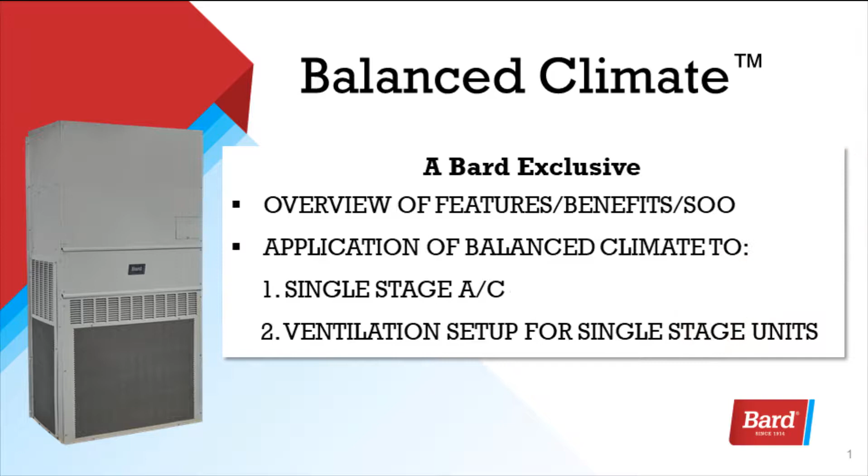Bard units are equipped with the capability of running in balanced climate mode as they are re-engineered to the 2019 Department of Energy standards. The remaining two-stage units already above the standard will have this feature added over the next 12 months as they are upgraded to the new cabinet style.

Balanced climate is designed to increase the comfort level by reducing the indoor humidity. Extended runtime with reduced airflow allows the unit to extract more humidity during cooling operation. Balanced climate provides quieter operation, up to 35% less humidity in the space, and this depends on the model and the conditions. It provides softer starts and increased comfort level.

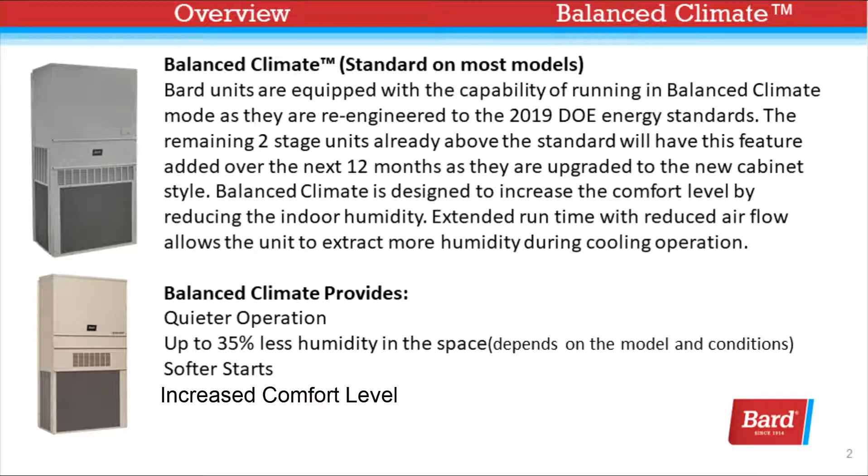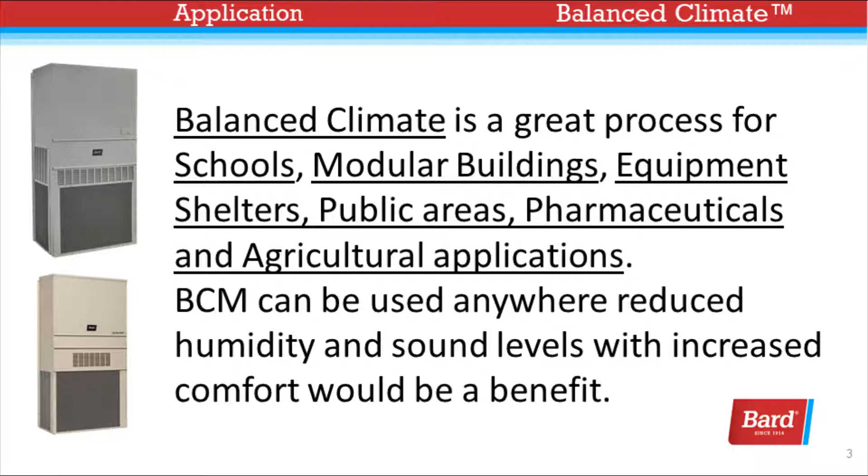Balanced climate is a great process for schools, modular buildings, equipment shelters, public areas, pharmaceutical and agricultural applications as well. Balanced climate mode can be used anywhere reduced humidity and sound levels with increased comfort would be a benefit.

All units are shipped set up to run in standard mode just the way Bard units have been in the past. To engage balanced climate mode, simply remove the brass jumper as seen on the right between Y1 and Y2 and install a two-stage thermostat. This applies to single-stage applications where the lowest set point is 72 degrees and no vent package is installed. Applications requiring a lower set point than 72 degrees may cause icing on the evaporator.

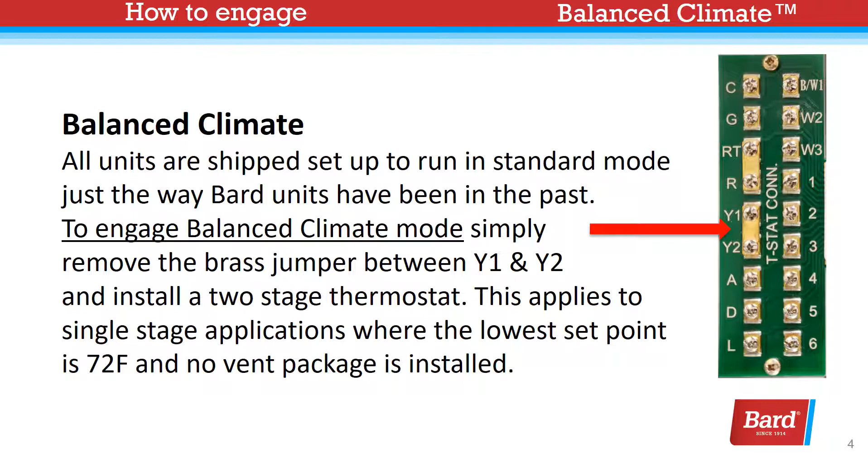Y1 will automatically bring the air conditioner on in balanced climate mode and extract the maximum amount of moisture while cooling the space. If the temperature continues to rise, Stage 2 on the thermostat, Y2, will gently shift the wall mount to standard full load cooling with the rated airflow.

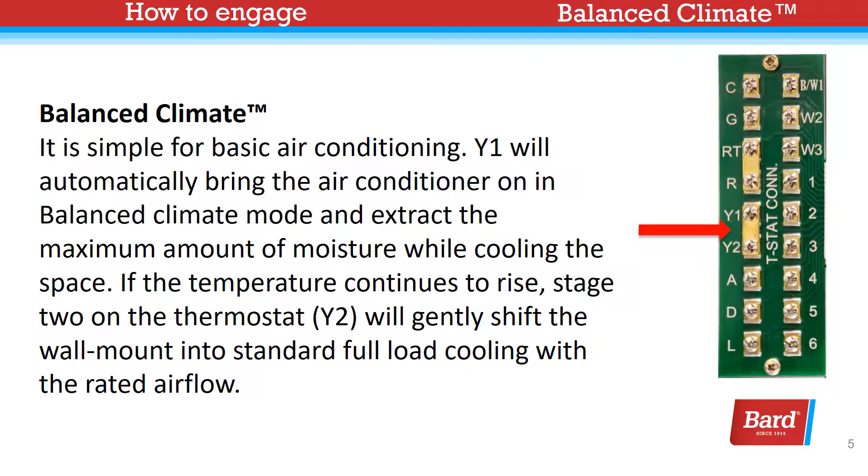At the top left, the 3-ton unit, you can see 95, 80, 67 conditions produced a 24% increase in latent cooling or moisture removal. At the bottom left, 95, 75, 62 conditions, balanced climate mode latent cooling increased by 52%. For more balanced climate data, please see the model specification sheet.

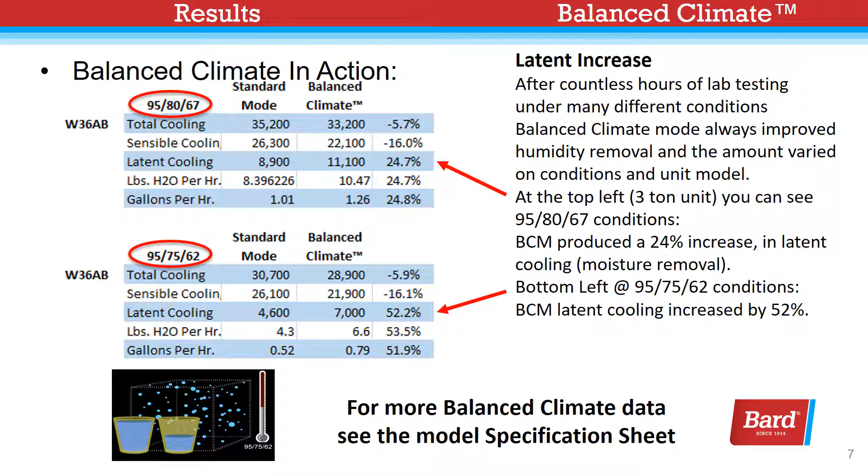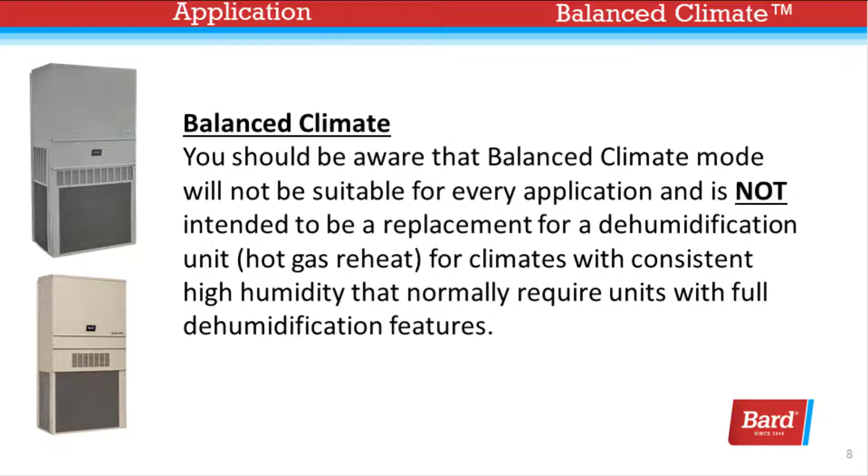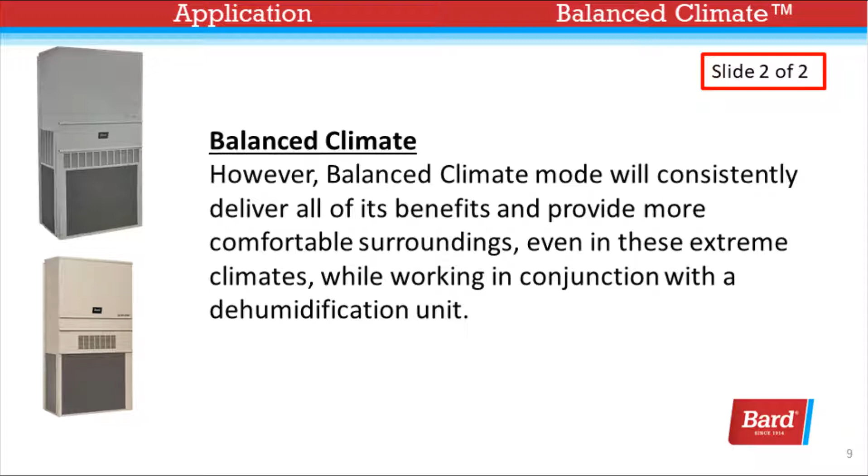You should be aware that balanced climate mode will not be suitable for every application and is not intended to be a replacement for a dehumidification unit or hot gas reheat for climates with consistent high humidity that normally require units with full dehumidification features. However, balanced climate mode will consistently deliver all of its benefits and provide more comfortable surroundings even in these extreme climates while working in conjunction with a dehumidification unit.

Also, on applications where the sensible BTUs are very close to your required BTUs, enabling balanced climate may not be the right decision. Remember, we convert some sensible BTUs to latent BTUs for dehumidification purposes.

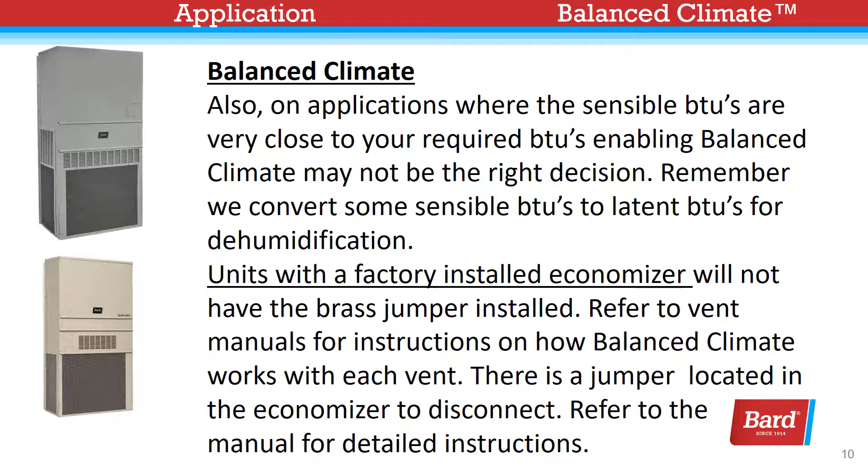Units with a factory-installed economizer will not have the brass jumper installed. Refer to the vent manuals for instructions on how balanced climate works with each vent. There is a jumper located in the economizer to disconnect. Refer to the manual for detailed instruction.

If the application is likely to require air conditioning operation below 60 degrees outdoor conditions or is installed with any ventilation package, a Bard low ambient control kit must be installed. The low ambient control kit is equipped with an additional sensor that disables balanced climate mode when the outdoor temperature drops below 50 degrees Fahrenheit. This prevents potential evaporator coil freeze-up issues.

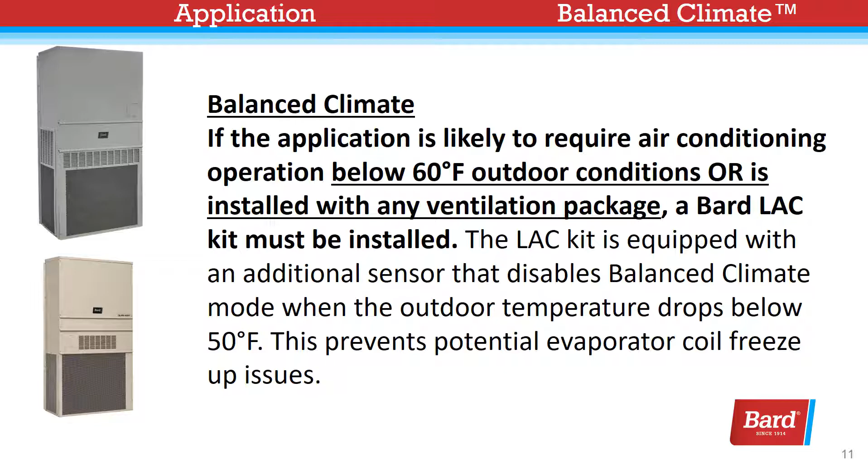Because part of balanced climate depends on lower airflow, attention needs to be directed toward the system static pressure when balanced climate mode is engaged. The system static pressure needs to be verified below 0.2 of an inch water column. For ductless applications with the correct registers and grills, there won't be a problem. However, some ducted systems will not be a good candidate for balanced climate.

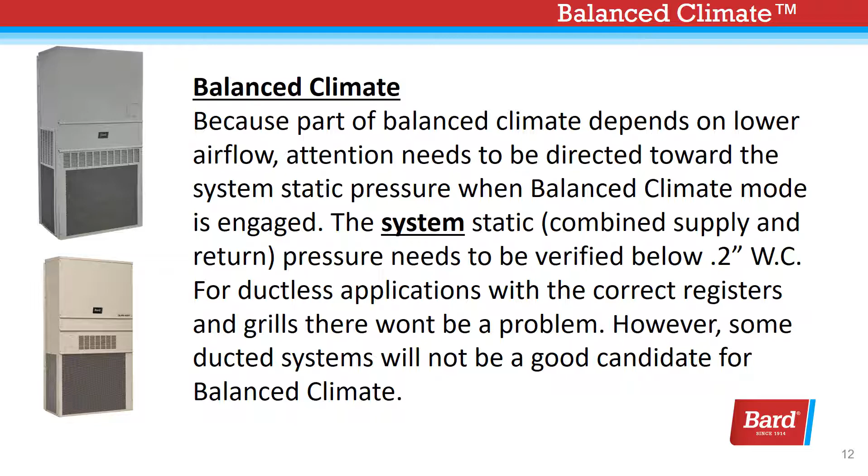Here we're looking at a single-stage system with no vent package. To operate a single-stage unit in balanced climate mode, a two-stage cooling thermostat is required. The lower indoor airflow operation is overridden by using that two-stage stat.

If the call for cooling is not satisfied within a given time frame or temperature differential as specified by the thermostat, it will send a signal to Y2, which then increases the blower speed back to the rated speed, creating more sensible BTUs and removing less humidity. See unit installation instructions for more blower speed selection options.

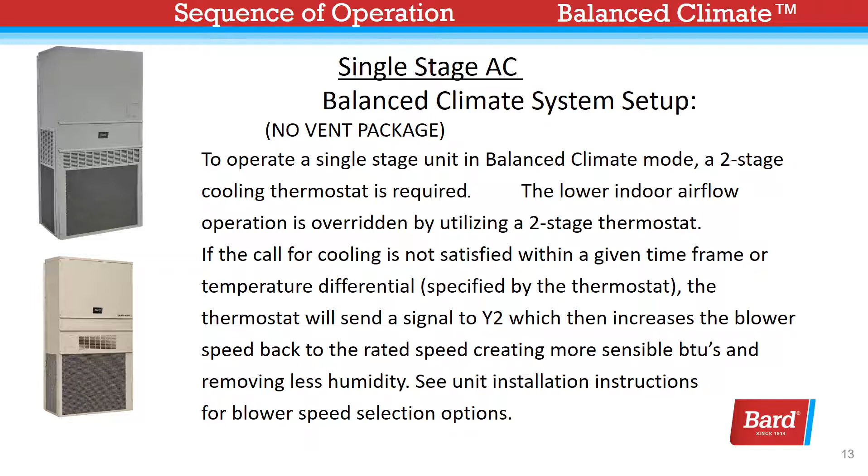With a vent package, setup will vary depending on the type of ventilation package selected. For complete instructions, please review the instructions shipped with the vent, or unit if the vent is factory installed. The following slides are an overview.

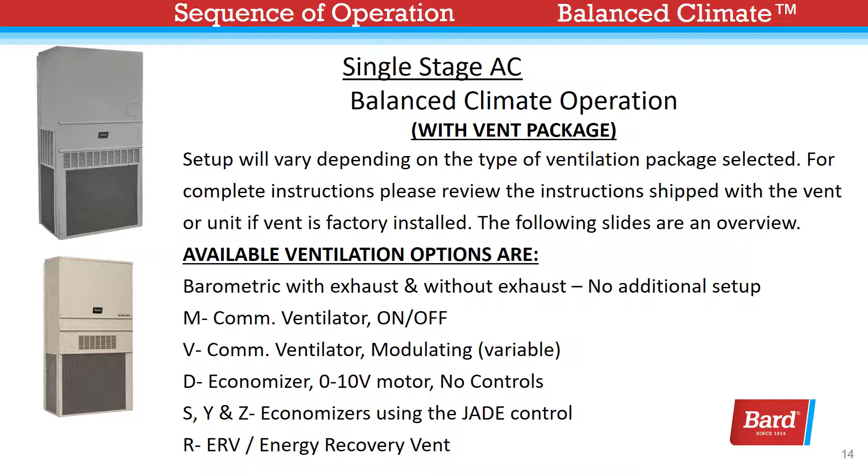The available vent options are barometric with exhaust and without exhaust, and there's no additional setup for these. The M vent option is a commercial ventilator with a simple on and off. The V is for variable on a commercial ventilator. D is for a DDC economizer with a 0 to 10 volt motor and no controls. S, Y, and Z are economizers utilizing the Jade control, and the R package is for an ERV.

Slide 1 of 2. For an M package, which is a partial flow commercial ventilator with a simple on and off.

Units ordered with this option or field installed vent kit are shipped with a jumper from Y1 to Y2 installed. Removing this jumper activates balanced climate mode. Because both balanced climate and space ventilation depend on a single source blower, there are variations to consider.

First, stage 1 cooling with a call for ventilation moves the fan speed to the balanced climate and opens the ventilator. To achieve your specified CFMs for ventilation, you'll need to increase your settings and adjust for the balanced climate airflow. You'll be slightly over your specified CFMs if the temperature increases and Y2 is energized, causing the fan speed to increase. However, this will meet your required CFM and deliver superb comfort.

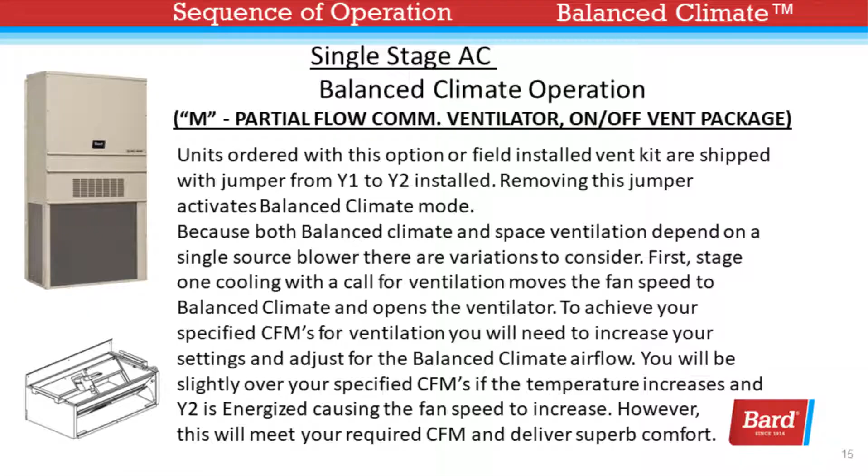Blade adjustment for desired ventilation air. Remember, on all the vent packages, the amount of ventilation air is dependent on 4 factors: return air duct static pressure, supply air duct static pressure, indoor blower motor speed, and the damper blade open position. So in all cases, Bard recommends an air balance. In lieu of an air balance, we give you some suggested settings that should get you very close to what you're looking for. Refer to the appropriate graph in the manual and be sure to compensate for the balanced climate mode fan speed.

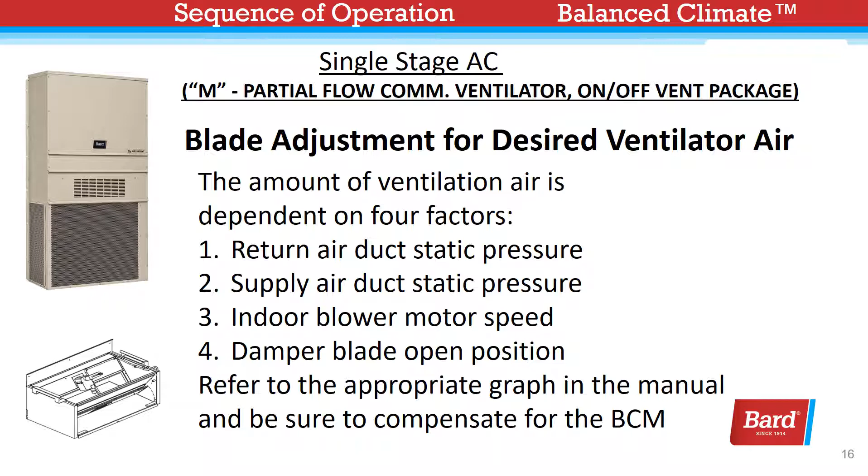For the V package, which is a commercial ventilator with a variable blade operation, when engaging balanced climate with the modulating vent package, follow the instructions included with the vent. During setup, the blade will need to be adjusted to a setting between 25 and 30% more air than required for ventilation to overcome the balanced climate fan speed and meet the ventilation requirements. However, when the speed is increased on a Y2 second stage cooling call, you will be slightly over-ventilating. The code will be met and comfort for all.

If a CO2 controller is used, the damper will automatically adjust for the correct number of occupants based on CO2 and fan speed. This is a recommended setup method.

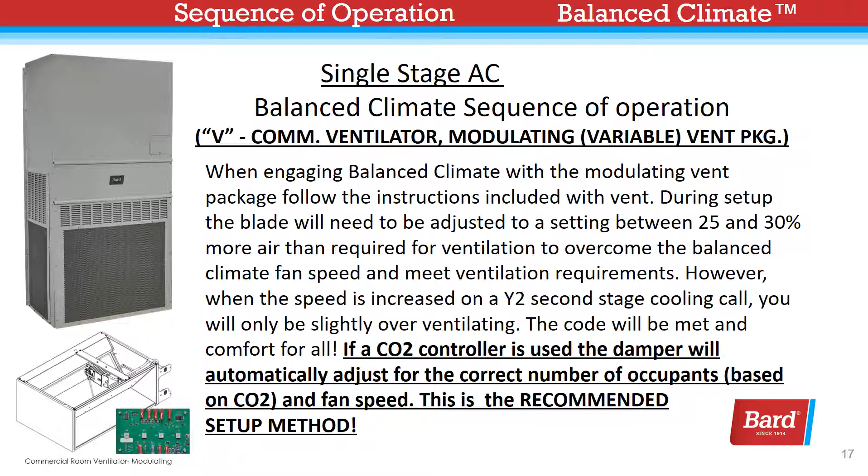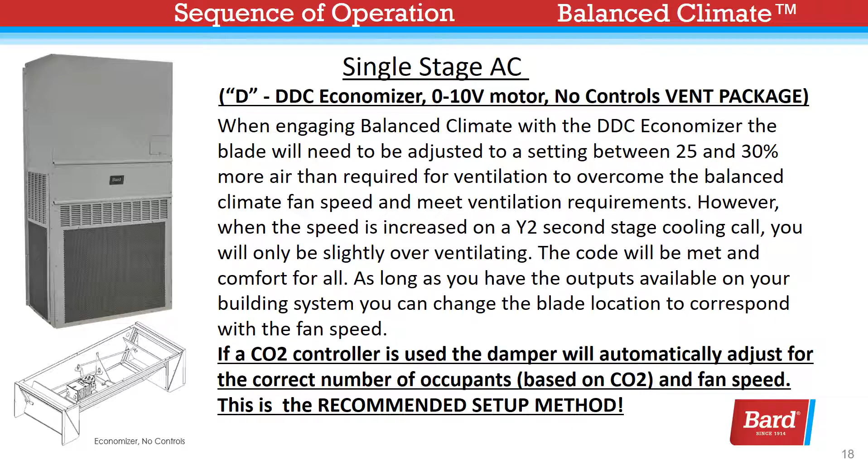As long as you have the outputs available on your building system, you could change the blade location to correspond with the fan speed. If a CO2 controller is used, the damper will automatically adjust for the correct number of occupants based on CO2 and fan speed. This is the recommended setup method.

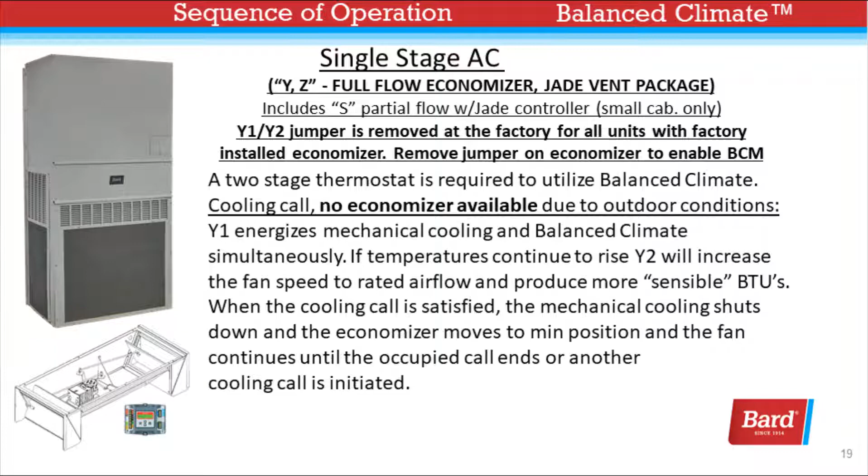For the S, Y, and Z Jade-controlled economizers, a two-stage thermostat is required to utilize balanced climate. If you have a cooling call and no economizer is available due to outdoor conditions, Y1 energizes cooling and balanced climate simultaneously. If temperatures continue to rise, Y2 will increase the fan speed to the rated airflow and produce more sensible BTUs. When the cooling call is satisfied, the mechanical cooling shuts down and the economizer moves to min position. The fan continues until the occupied call ends or another cooling call is initiated.

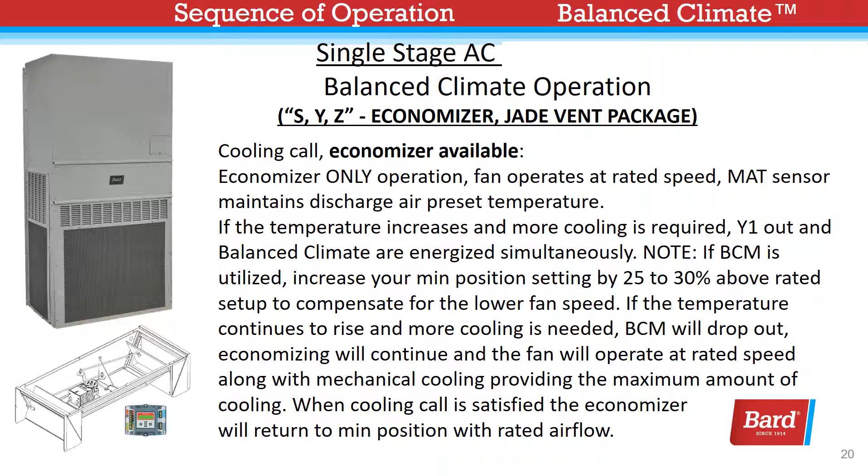If the temperature continues to rise and more cooling is needed, balanced climate mode will drop out, economizing will continue, and the fan will operate at rated speed along with mechanical cooling, providing the maximum amount of cooling. When cooling call is satisfied, the economizer will return to min position with rated airflow.

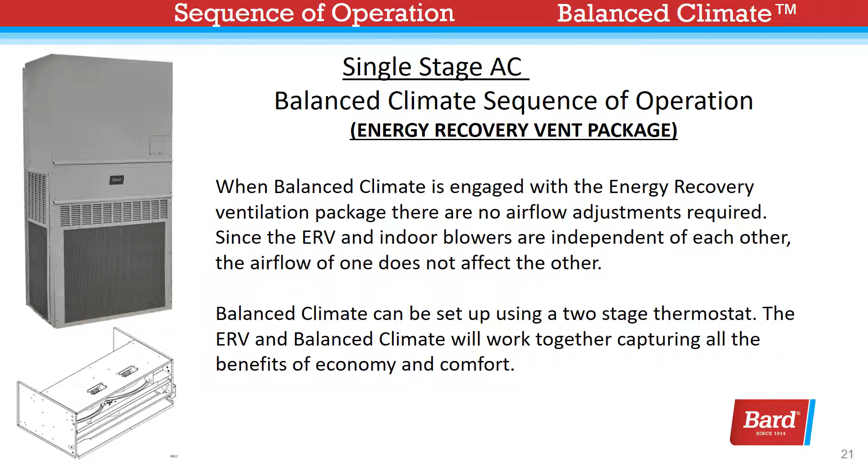When balanced climate is engaged with the energy recovery ventilation package, there are no airflow adjustments required. Since the ERV and indoor blowers are independent of each other, the airflow of one does not affect the other. Balanced climate can be set up using a two-stage thermostat. The ERV and balanced climate will work together, capturing all the benefits of economy and comfort.

Let's review this system. Bard's balanced climate mode will fit many applications. All applications require attention to airflow. We must have less than 2/10 of an inch of water column on the static pressure. The static pressure listed is system static, and that's combined supply and return numbers. 72 degrees is the lowest allowable cooling set point in balanced climate mode.

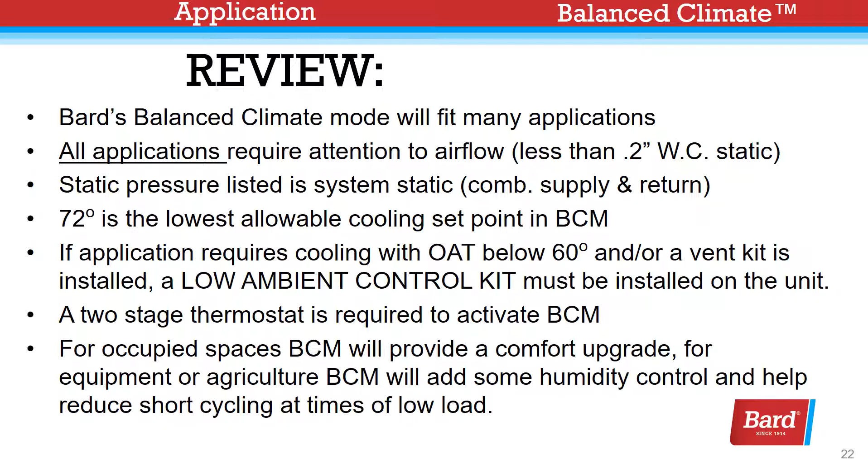If application requires cooling with the outdoor air temperature below 60 and/or a vent kit is installed, a low ambient control kit must be installed on the unit. A two-stage thermostat is required to activate balanced climate mode. For occupied spaces, balanced climate mode will provide a comfort upgrade. For equipment or agriculture, balanced climate mode will add some humidity control and help reduce short cycling at times of low load. Thank you for checking out our balanced climate video, and thank you for choosing Bard.